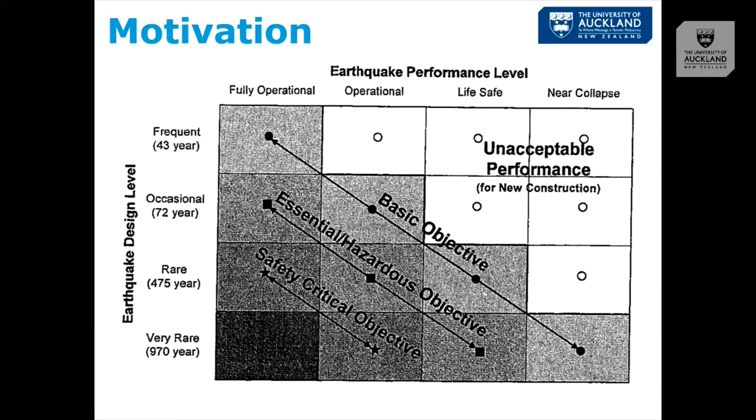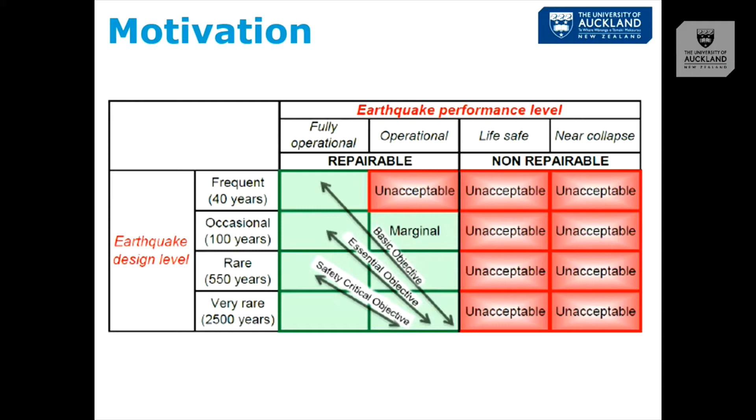Now there are different ways of achieving that. One is to use low damage devices - dampers, base isolators, you name it. There are many of them: proprietary, expensive, difficult or easy to design. In my opinion, they will not be widely adopted. If you're designing a hospital or fire station, yes, perfect, it's the perfect application. But not for every building, every office, every residential building.

In my opinion, we should have strong, stiff buildings that don't suffer damage. How do we do that? We can reduce the drift - 0.5%, 1%, even less. We can reduce the ductility - 1, 1.5, 2. Basically we're reducing the damage. So it's a low damage design approach, we just don't use fancy tools that make other people rich.

When I started talking with friends, engineers and colleagues about why we don't design strong and stiff buildings like they do in other countries, like Japan and Chile, a lot of people smarter than me, with much more experience, told me it would be too expensive. But a lot of other people, also smarter than me and with more experience, told me that's actually just a perception. But both of those groups didn't have the data - it was their opinion.

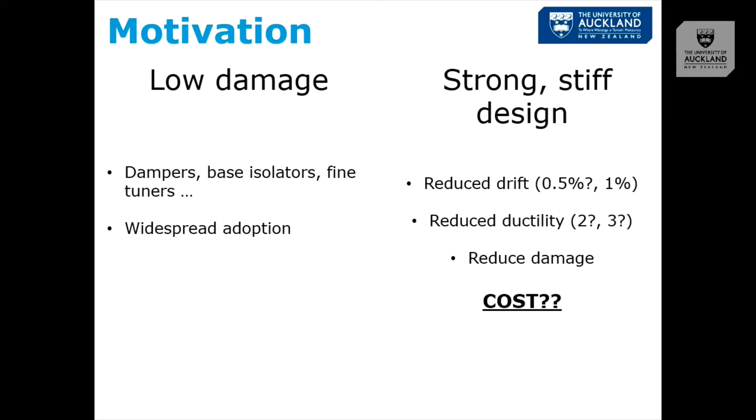So that's what I intend to do - to understand what the construction costs are of designing more seismic resilient buildings, buildings designed to a higher seismic demand.

I started this project looking at - my initial approach was - let's take a few buildings, 5, 10, 15, that have already been designed. We know the cost, we know the seismic performance, and then redesign them to a higher seismic performance, or reduce ductility or reduce drift, and see how much more it would cost.

But that was very, very difficult. People didn't want to share their designs, owners didn't want to share how much they paid for their buildings. And for some reason I don't understand yet, in New Zealand we don't design regular buildings - every building is different, with weird corners, with re-entrant corners. I know architects, my wife is an architect, but we should try to design regular buildings, not concrete walls here and steel braces there - just buildings that are regular and the same in both directions.

Anyway, the point is that if I take a building that has concrete frames here and concrete walls there, I can only apply what I learned from that building to other buildings that are like it. So it was quite limited.

So I sat down and thought, okay, I need to rethink how I'm going to do this. I decided to develop an extensive database of buildings. And by extensive, I don't mean 200, I mean thousands - 10, 20, 30,000 buildings with different structural systems, different foundation systems, and hopefully different non-structural designs.

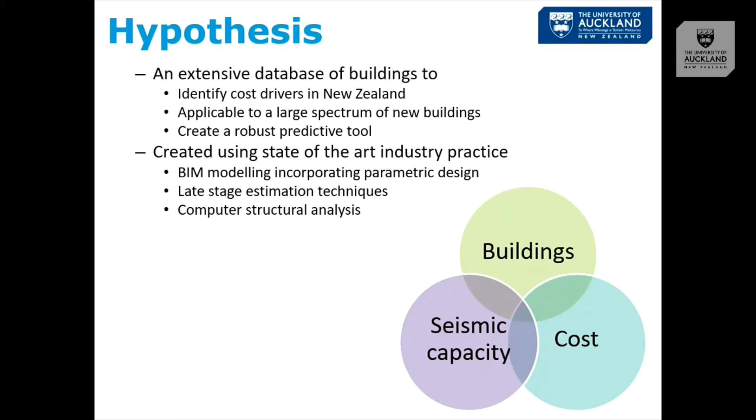And then developing the methodology - how are we going to create 20,000 buildings? We are now starting to get data on frames, walls, and steel buildings, and hopefully next year expand that to foundations and related earthworks and non-structural elements. Put everything together, and create a tool that we can use, relatively simple, and give us an accurate construction cost for the project.

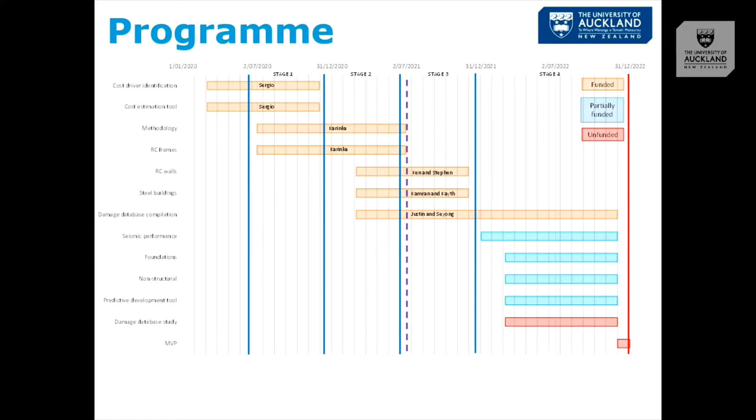Now, we started with the literature review. I'm not going to bother you with a lot of information, but the main thing we learned is that the early cost estimation methods at the early stages of the development process are not very accurate.

So I'm going to develop a building, so many square meters, how much per square meter, that's my cost. The best accuracy we can get is plus minus 25%, but it's more frequently minus 50, half, or plus 100, twice as much. But as we move forward in the development, in the construction process, the estimates are more accurate - at least plus minus 5%, but usually more like 2, 3%.

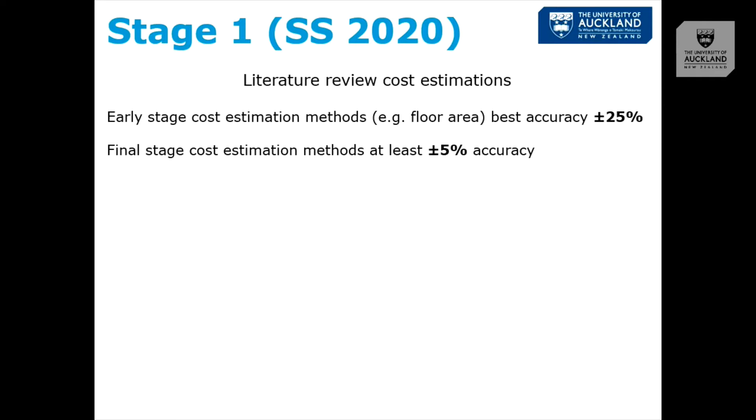So we want to use final stage cost estimation methods in the early stages of the building development or design.

Now, the second thing my student did is read something like 120 papers from all over the world on the use of predictive analytics to estimate construction costs or building costs. He collected something like 70-something cost drivers or parameters that affect the cost, then he ranked them, and then he scored them - so we know not only which one is more important, but by how much.

Some of these are sensible, expected, like floor area, number of floors - of course, if your building is big, it's going to be expensive. But some others are not so much, like number of elevators. In hindsight it makes sense - if you have 4 elevators, it's not going to be 4 times more expensive than 1, but it's more expensive.

The problem with this is the data is not from New Zealand, so they will not have seismic provisions. So we need to redo it again, basically.

Another thing we learned is that the predictive tool doesn't really matter. Computer scientists get all excited about developing new machine learning algorithms, but it doesn't matter. What matters is the data - that you have a lot of data points representative of what you want to predict.

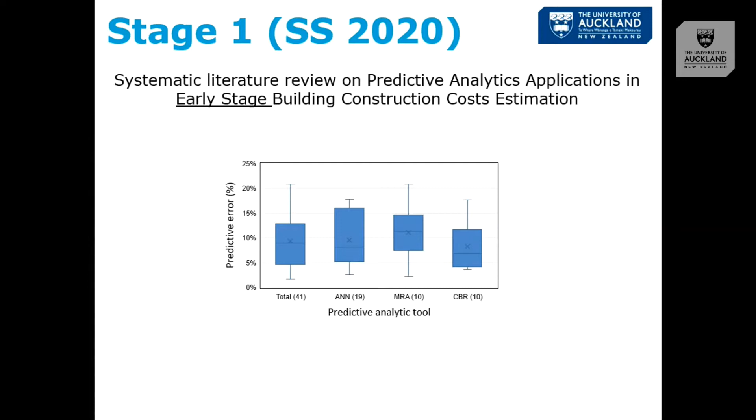Now we move on to the very limited research with New Zealand data. This is a PhD thesis, and what this person did is investigate the building development cost. So it's not only design or construction, it's everything involved in development - hiring people, procurement, everything.

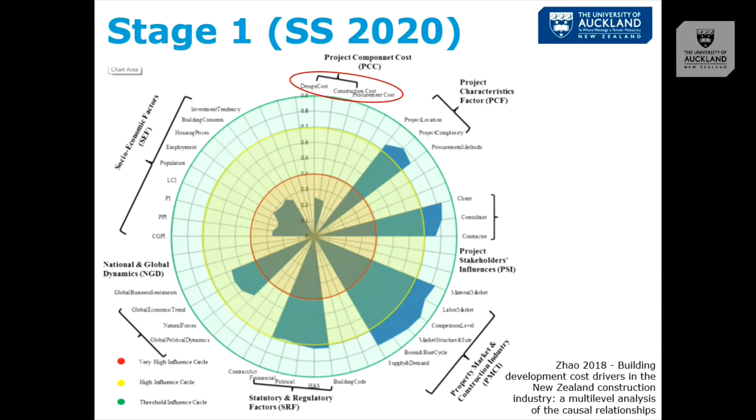Now, on the left-hand side we have information from the quantity surveyors. On the right-hand side is a final year research project from Canterbury, from Professor Rajesh Dhakal. Basically, this tells us that between 20 and 25, 30% of the construction cost comes from the structure - so structural costs are 25% of the total construction costs. So even in the worst case scenario, making buildings suffer less or no damage costs 30% more of the structural cost, which is 30% of 25%.

And then our buildings don't have to be unoccupied for months or years. The businesses can continue making money, the people don't lose their homes. I think it's worth it, even in that worst case scenario.

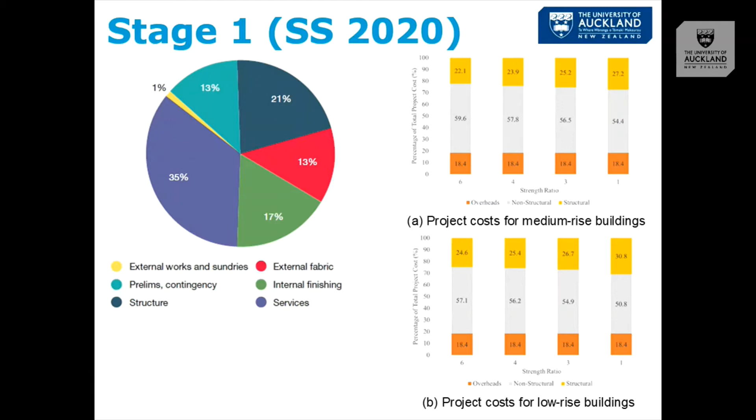Now we move on to how we are developing this database. We start with Resist, which is a software from NZ SEE that does preliminary seismic design. It has several limitations, some quite critical, but most can be overcome, and it's extremely fast - I can literally do a preliminary design of a building in 1.5 minutes. It's very easy to change between different structural systems and structural sizes, so it's very powerful in that sense.

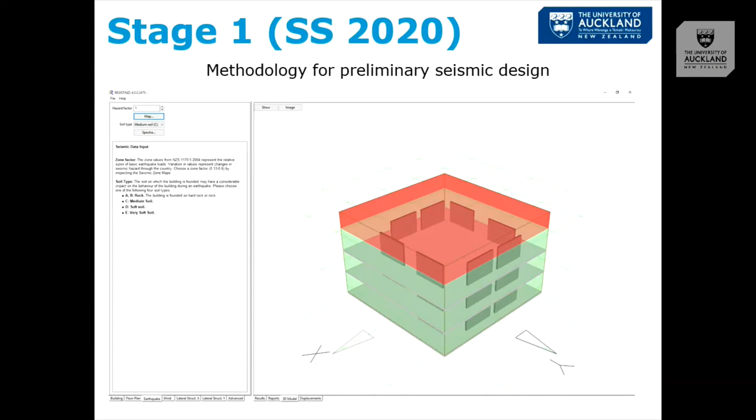Then we select the seismic hazard factor - I have one hazard factor of 1 there. I know 1 is not in the current code, but that's the maximum that Resist admits. Then the type of soil, and then we change the structure - in this case, frames. We change the diameter, the breadth and width of the columns, the number of bays, the number of frames, until we hit 100%. If we're over 100%, it doesn't comply; below 100%, it complies.

From here we can get a lot of information, but I'm not going to go into too much detail. We can get displacements, drifts, engineering reports with all the loads, base shear, and architectural reports. I'm not selling the software, I'm just saying it's quite powerful, even though I'm just brushing over it.

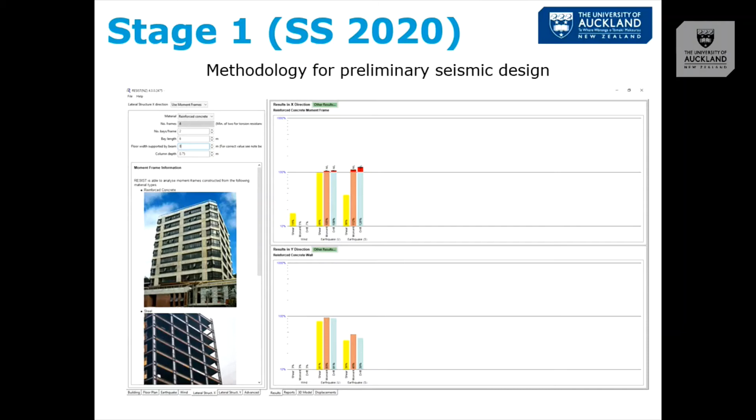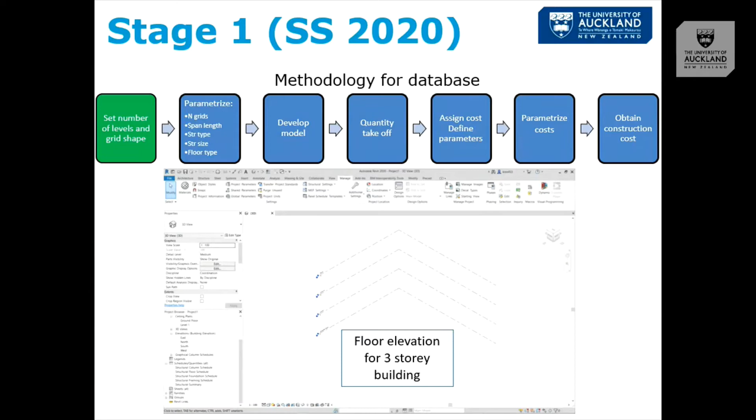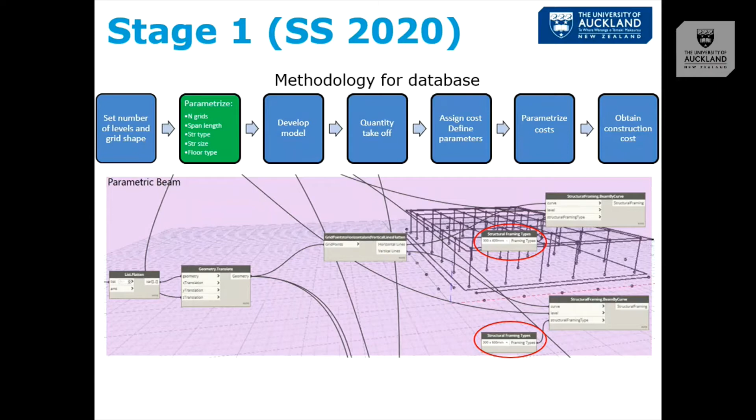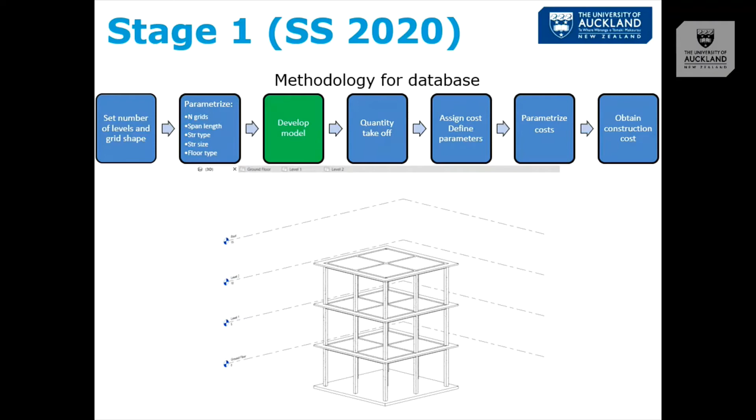From here, we get the dimensions and characteristics of the structure, which we use in Revit to model the building. Because we don't want to model too many buildings, we use a tool called Dynamo, an add-on that allows us to parameterize the design. So we can change the beam, change the floor slab, different types of floors, very quickly - it's a visual parametric modeling tool. Then Revit creates the model automatically, and with one click gives us the quantity takeoff.

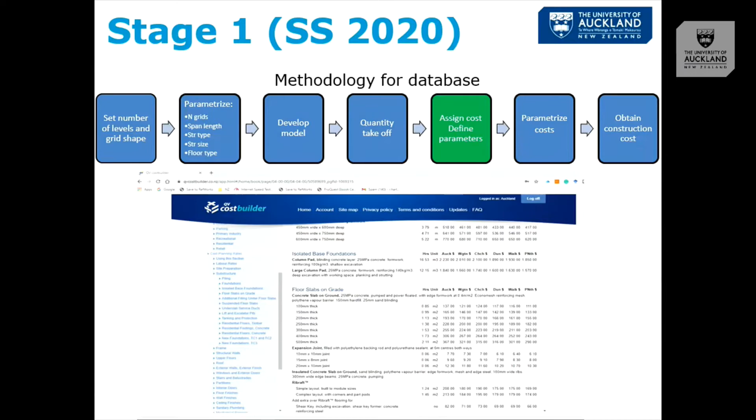Then we go to QV Cost Builder, the tool that quantity surveyors use for costing, and we multiply, for example, square meters of floor times the cost of the floor. We can parameterize further this relatively limited number of BIM models by changing the thickness of the topping, changing from ComFlor 60, ComFlor 80, different types of steel. For a fixed reinforcement ratio, it's not the same to have a lot of small bars than fewer bigger bars from a costing perspective - it has different costs. Then different cities. All of that is implemented into the database using MATLAB, Python, or Excel.

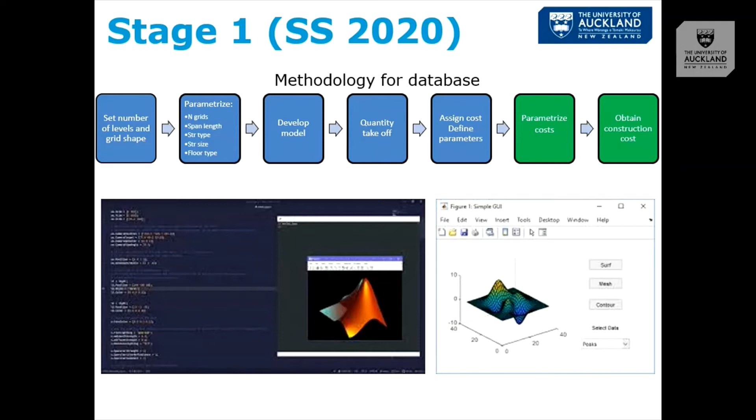Now I'm going to give a very brief overview of the results that we have so far. So this is concrete frames. We can see that these are the models developed in BIM only. We have 3 and 8 stories, 3 and 10 grids, 2 hazard factors, 0.4 and 0.7, and 3 types of concrete floors. These are grouped together because we consider them as the same dead weight. So this gives us 16 BIM models.

But then, by using different costs in different cities, different reinforcement ratios, different concrete strengths, and so on, we get about 1,300 models, only for concrete frames with one type of foundation. So when we incorporate different types of foundations and non-structural elements, it compounds, right?

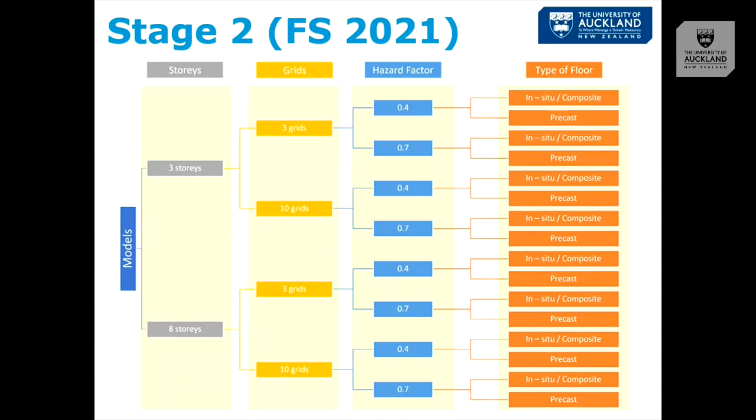Now, these are some preliminary results. They are not final. They can change. They can be wrong. But I think it gives a good gist of what we are getting and what we will get.

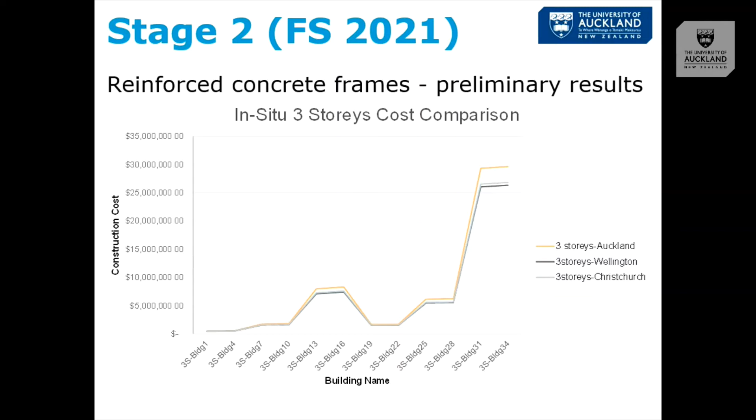We can see that the cost in Auckland is significantly higher than in Wellington and Christchurch, for all buildings. Obviously, the bigger the building, the bigger the difference. In Wellington, it's about 11% cheaper than Auckland. Christchurch is around 9% cheaper than Auckland.

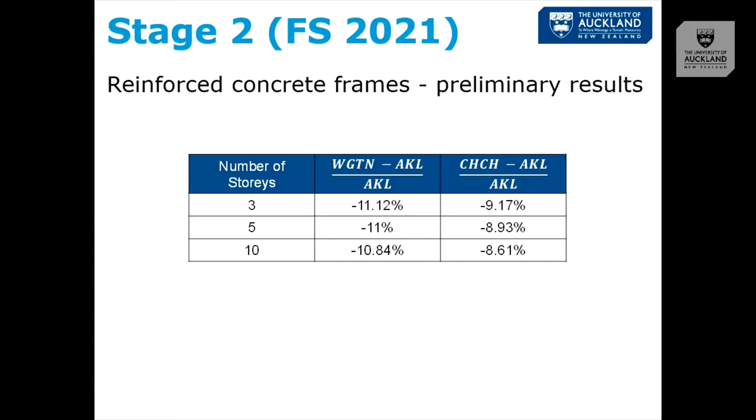This one is interesting, I like this one a lot. Before I continue, I know that a hazard factor of 0.4 in Auckland is not realistic. Even if we change the seismic hazard model, it will not increase to 0.4. But we are just looking at all different possibilities, and that can be used as a proxy for reduced damage, like we want the building to remain elastic.

Anyway, I like this slide a lot because it shows that in-situ floors are the most expensive. And between composite and precast, composite is actually cheaper than precast. So in theory, we use precast because it's cheaper. But if it's not cheaper, it's actually more expensive, even at the same cost. And if it doesn't work from a structural point of view, or it's so difficult to make it work, then maybe we should stop using precast and use only composite floors.

Anyway, I think we should stop using precast, period. I don't like precast floors.

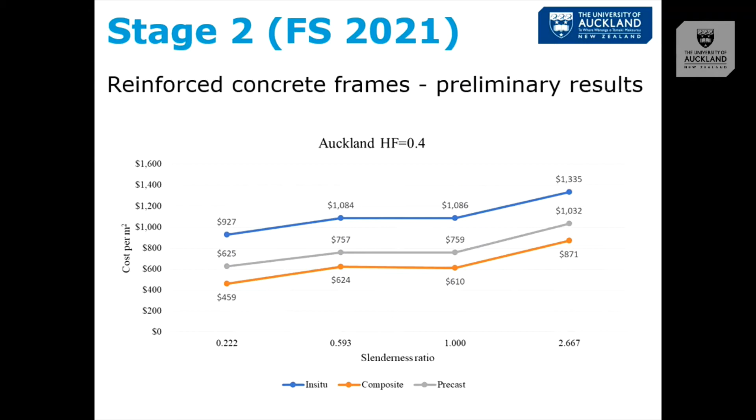Another thing is slenderness ratio. The cost is higher for slender buildings. So that building on 4th Street, which is thin but extremely tall, is more expensive than if you build the same building with the same floor area but more squat. So I think those kinds of rules of thumb are important.

Now, this one is very good, I think. We have 3, 5, and 10 stories, different column sizes, which represent different seismic capacities. The difference is so tiny that we cannot even see it. The largest difference for the largest building, 10 stories, is 2.4% to increase the hazard factor from 0.13 to 0.5.

Again, this doesn't include foundations or earthworks, which I think is going to be a big cost, or facades or non-structural elements. But everything else being equal, we are only increasing the cost by 2.4%. Even if it's 5%, isn't it worth it to increase the cost 5%, assuming the hazard factor goes from 0.13 to 0.5?

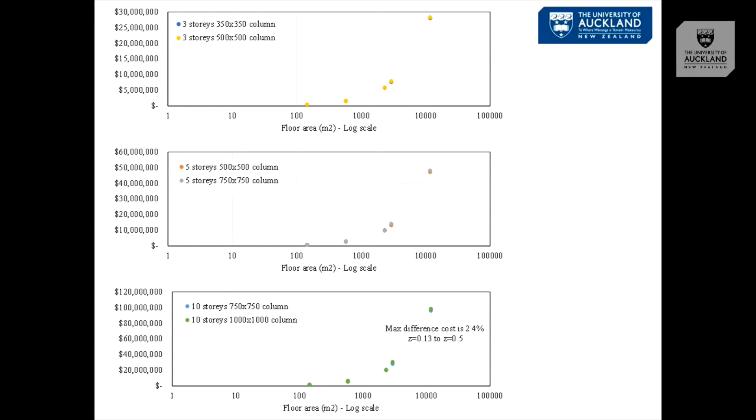Now, we started with frames. Now I'm going to talk a little bit about concrete walls and then steel structures. For concrete walls, we are looking at the same building size, height, size of the structure, and reinforcement ratio.

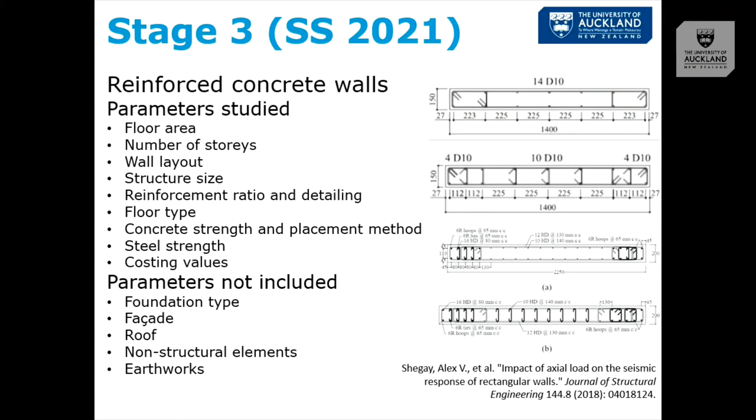One challenge we have with walls is as the building gets bigger, both in size and height, and the hazard factor gets higher, we need more walls. So in this case, we have 6 walls. The building is 50 by 50 and 8 stories high, and we have 6 walls in each direction. The walls are, I think, about 12 meters long and 300 or 350 thick. It's a lot of wall.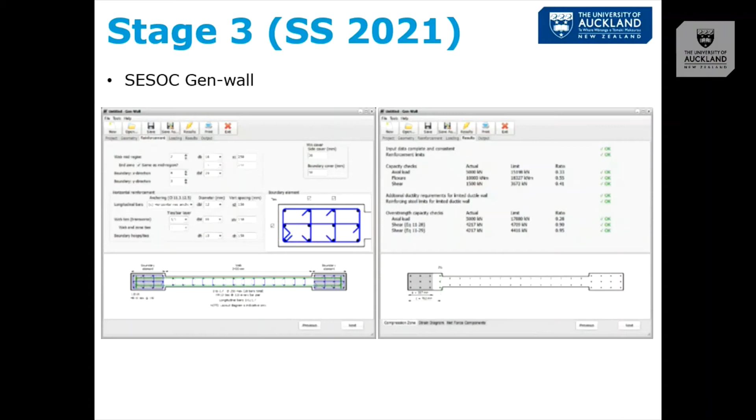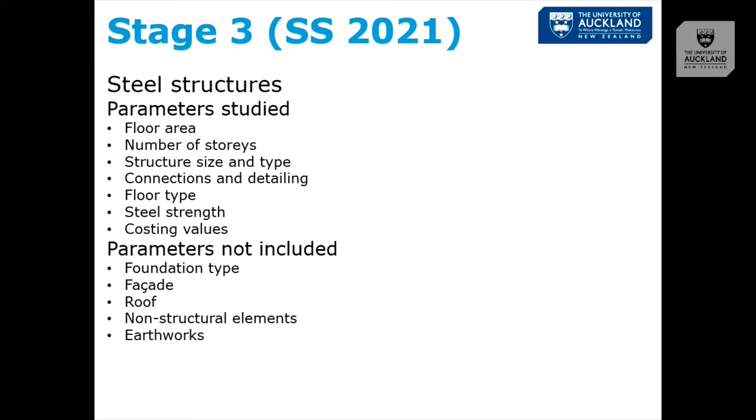Now with steel structures, same building size, different type of structures, and the connections are giving us a lot of problems. All about steel is connections, right? So we are looking at moment-resisting frames, braced frames and EBFs, and different types of floors. I'm not sure if I can respond a lot to steel questions because I'm using Charles Clifton, and I just rely on him, and I don't have to worry about it.

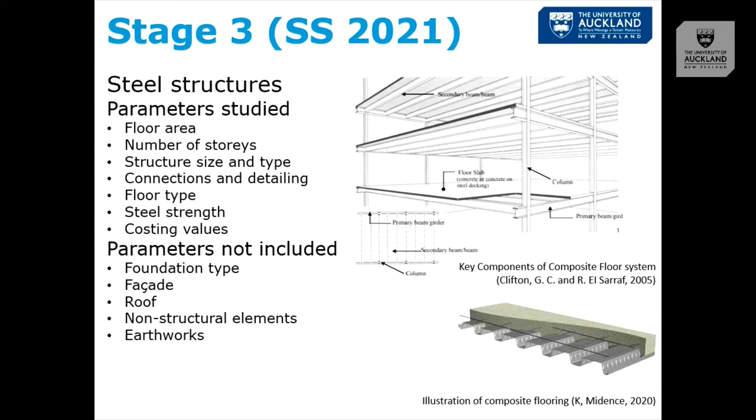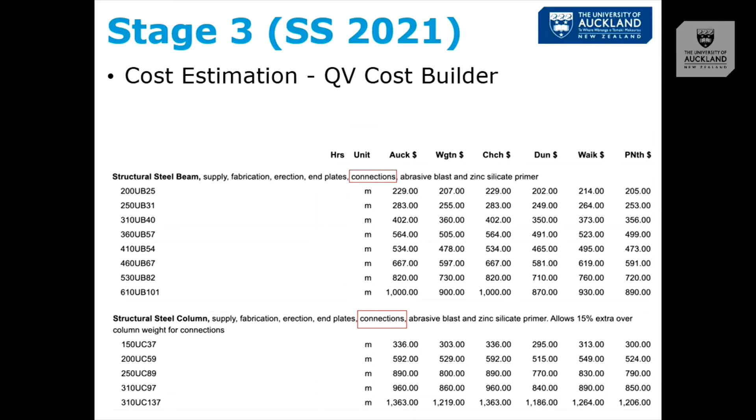But my students are there, so maybe they can answer the questions. One problem we are having is the cost estimation. This is from the QV Cost Builder app or web. In theory, for this type of universal columns, different cities, we have different sizes, and connection is included, but this is a bit broad. And in fact, it's over-conservative. It's too expensive. It's not the same to make a simple connection with 4 bolts than to make a very complex connection with several members in different angles. So it's more expensive, of course.

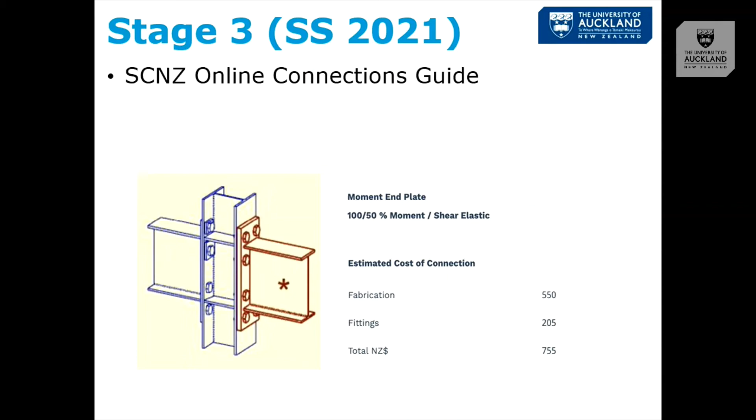So we are relying on the experts in here. We are using Steel Construction New Zealand. They have a connection guide, and we can do the costing much better, much more accurately.

And finally, next year, I want to do foundations and earthworks. I will need to hire a geotech because I know close to nothing about geotech. And then facades, how we can design facades that are cheaper. Non-structural elements, what happens with both the displacement or drift-dependent elements like gypsum board, or with acceleration-dependent elements like hanging elements, and then do a detailed seismic performance to really understand what the buildings are doing, not just rely on preliminary design. Maybe do some low damage technology, some basic ones like base isolators or dampers.

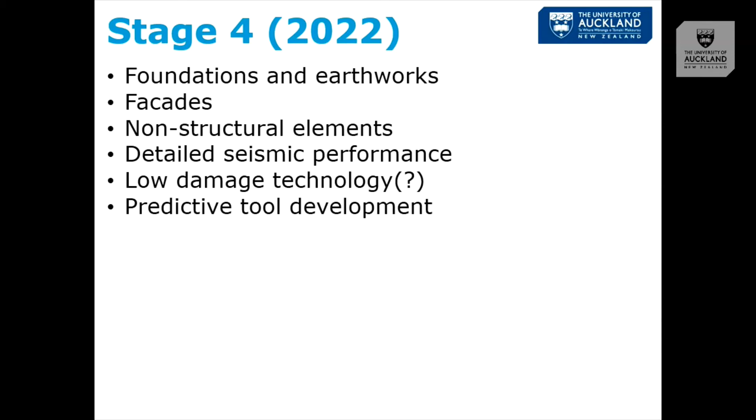And finally, I want to develop that tool that EQC wants to make available for everyone to be able to predict that cost accurately. That's all. Thank you.

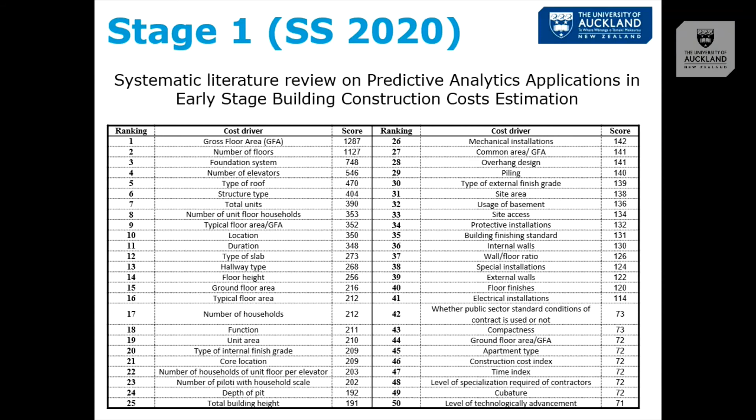With timber flooring, timber walls, it's like bedrooms, sort of 4 metres wide and 7 to 8 metres long, just an apartment, like a hotel room with a bathroom. In the transverse direction it had 7 metre long shear walls, 4 metre ceilings on both sides of the building.

So basically what you have is this: walls, walls, walls, walls, walls, walls, walls, walls.

It was like using low technology, because you've got a timber frame building, you need to fire rate it, so you use chipboard. So we used the chipboard for the shear walls as well, just using standard house technology, not having to put plywood and then more chipboard on it. So it's just using what was there, and the inherent layout of a hotel block, to get the result.

I think we should do that. I don't have experience with timber, sorry, I know it comes from trees and little more. But with concrete, we should do that. If we have 10, 8, 15 storey high buildings and we need to build walls, and if it's an office it's a little bit harder, but if it's residential, just use the structural walls to divide the building into apartments.

Actually, it was the question of putting a lift or double lift, and it was a 2.1 metre wide lift frame, and it was 2 lifts wide, and those 2.1 metre long braced frames were actually less stiff than the 7 metre long timber ones, which is the opposite of what you'd think.